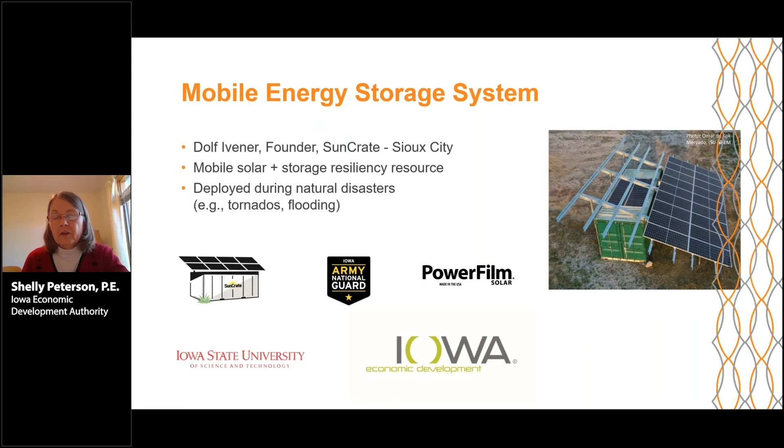Another example of that is a mobile energy storage system that we've recently worked with several partners on. And this project really deals with resilience and the importance of being able to provide energy in emergency situations and have a wide variety of dependable and available energy supplies.

So along those veins, we do believe renewable natural gas can offer many of these same opportunities in the state. We've got widespread biomass resources. This can be manure, corn stover, cover crops, landfills themselves actually can produce methane. And then there's a lot of food waste from the many food processors in the state, and from the consumer level as well. And all this has value in a renewable natural gas system.

These types of projects can offer a lot of benefits to the state as well. Not only can you generate revenue from that energy resource, but we're really beginning to explore the water quality benefits, odor control benefits, the ability to reduce the burdens on our landfills, and really begin to look at soil health as part of this overall system.

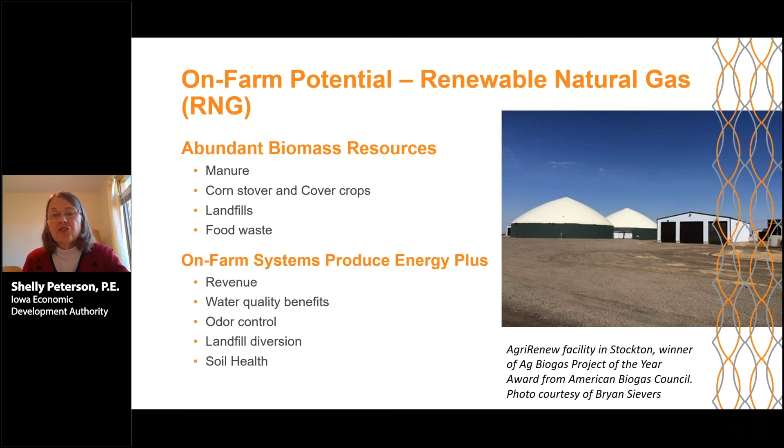The photo shown in this slide is from probably one of Iowa's first successful biogas systems in the state. This is operated by Bryan Sievers in Stockton. He's got 2,400 head of dairy cattle and has been running this system for going on 7 or 8 years. And a lot of lessons learned that he's shared, I think, really help prepare this next generation of digesters in the state.

Another example of a biogas project is Verbio, which has repurposed the DuPont cellulosic ethanol facility built in Nevada to begin accepting corn stover and producing renewable natural gas in the coming year. In addition, they're also going to produce corn ethanol here. So it will be the first facility in the US to produce both ethanol and RNG, and just another example of how this technology can fit with the many ag resources in the state of Iowa.

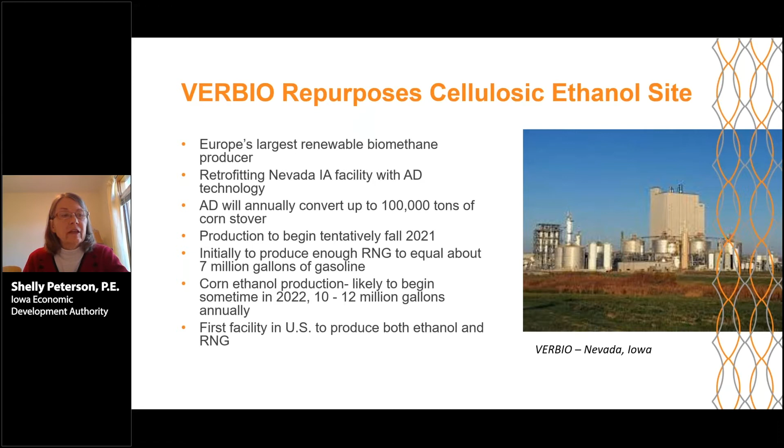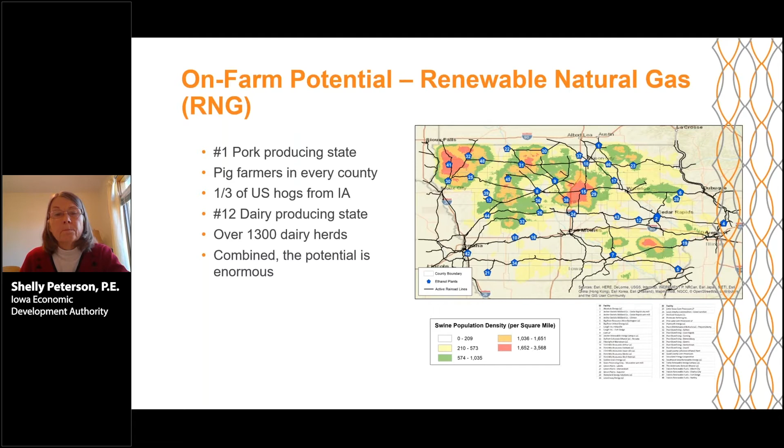As I mentioned, our office has been working in this space for a couple years. We've done a lot of mapping, like the graphic shown here, trying to identify where are the animal confinement operations, where are the natural gas pipelines, looking at the synergy between ethanol plants, which can use a lot of natural gas, and these animal confinement operations. And so we've looked at these various feedstocks, different end users, done some economic analyses, and again, just are moving ahead with thinking that these projects could really open up in the state and really serve as an economic driver.

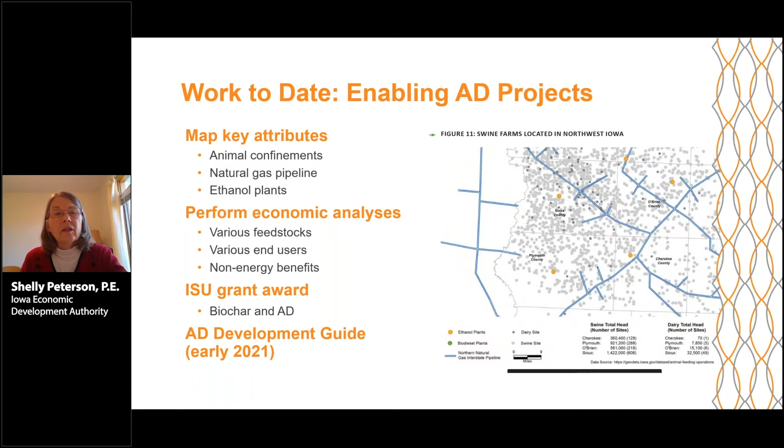We've issued some grants to Iowa State University. There's a lot of research going on in anaerobic digestion. And in early 2021, we've got an anaerobic digester project development guide that EcoEngineers is working on, which should be released, and hope to just maybe provide a roadmap for people that are looking to get into this type of project development.

And it's not just the producers that have goals along these lines. A lot of the food processors throughout the state and throughout the country are also really bringing forth pretty ambitious sustainability goals. And so there's, I think, a definite partnership between the producers and the food processors with these common goals. I think that really sets us on a good pathway to bringing biogas systems into the state.

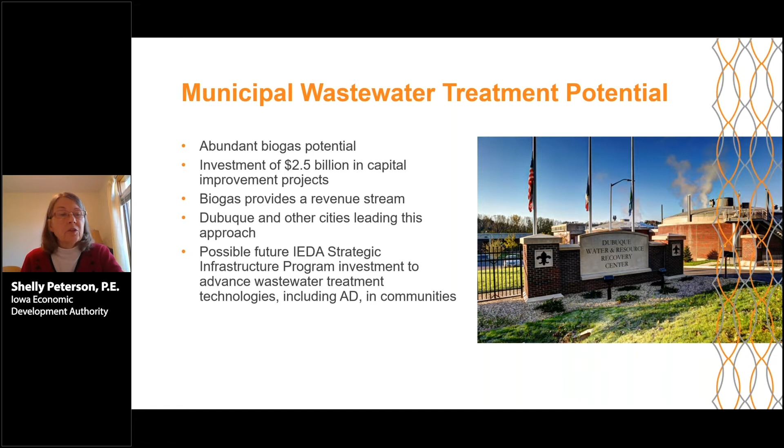So in response to the COVID pandemic, the governor assembled an advisory board recently, and there were a number of committees and subcommittees that met. And one of these was the Agricultural Working Group. And this group came out with a number of recommendations, two of which kind of floated to the top. That was a need for long-term water quality funding. But more importantly to this discussion is the formation of a carbon sequestration task force to really look at the role between farmers and long-term sustainability efforts.

And so this group is going to kick off in 2021, and I think will really help us evaluate anaerobic digestion and other actions that can really support these larger carbon goals that the state will be considering, and how we can play a space in the national effort and programs to better account for carbon management, especially as it relates to soil health in our state.

And so again, I'm with the Iowa Economic Development Authority. Our sister agency is the Iowa Finance Authority. And just yesterday, I learned more about a project for three large anaerobic digesters that's been proposed in the northwest corner of the state. And a request came into the Iowa Finance Authority to help them with a bonding project. The Iowa Finance Authority has the ability to bond for private activity bonds, and was looking to partner with the group to do that. So we'll be watching that too in the coming months to see what role our organizations can play as partners look to find ways to finance these types of projects.

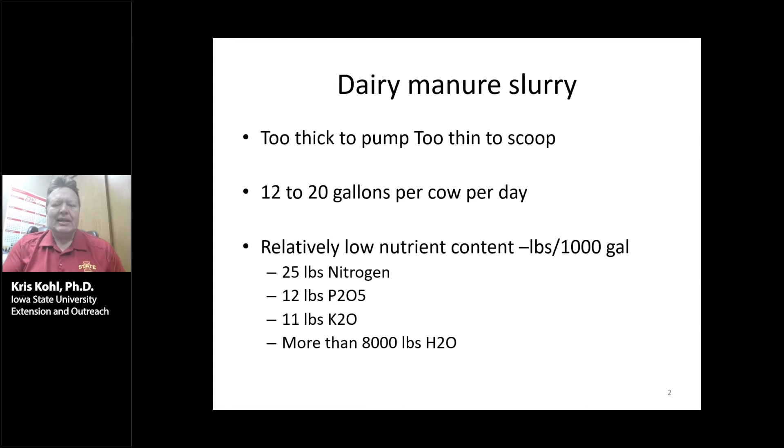It's made up normally of about 10% or so solids. At 20%, you can scoop it up and put it into a spreader, and it will spread just fine. It's mostly water, and water is heavy, and at this point we don't see it as all that valuable on our landscape.

Dairy manure tends to have a high cost for handling, storing, and land applying. Generally speaking, if we look at all of those things, the fertilizer value in the manure will not cover all of the cost. And then it often, I'll just say, contains what I'm going to call hidden hazards.

Sand bedding is a fairly standard thing in our free stalls. The sand is going to be very corrosive and wear hard on steel moving parts. Oftentimes there'll be other stuff that can end up inside the manure that's, I'll say, junk, like twine.

I was at a dairy, and they were having a lot of problems getting rid of their manure, and they couldn't get people to even pay for the nutrient content when it was land applied for free. I went out to the storage pond, and I looked across the whole thing, and it was covered with jellyfish. And I'm like, what is all this jellyfish? I've never seen jellyfish on a manure storage structure.

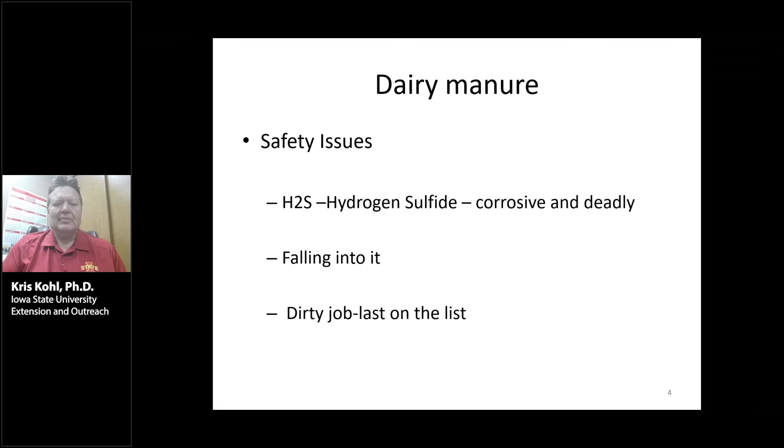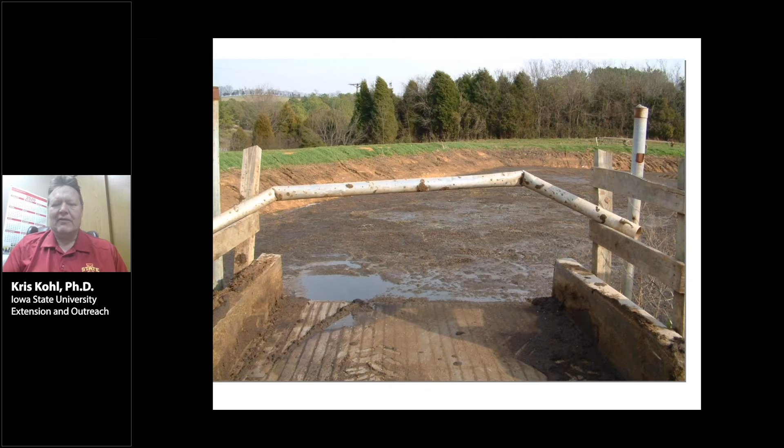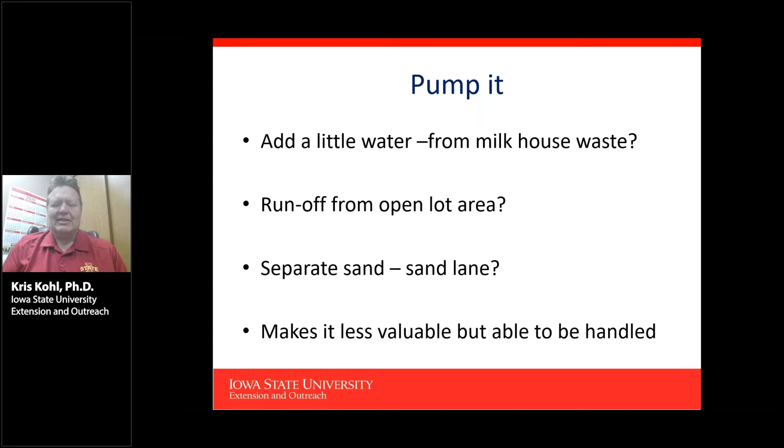We're going to pump it. We probably need to add just a little bit of water, maybe from the milk house. Wash water will make it so that it pumps a little better. Little runoff from an open lot area. And if we're going to pump it, we probably need to separate out the sand so it doesn't destroy the pump. And adding a little bit of water does make it a little less valuable, though not that terribly much.

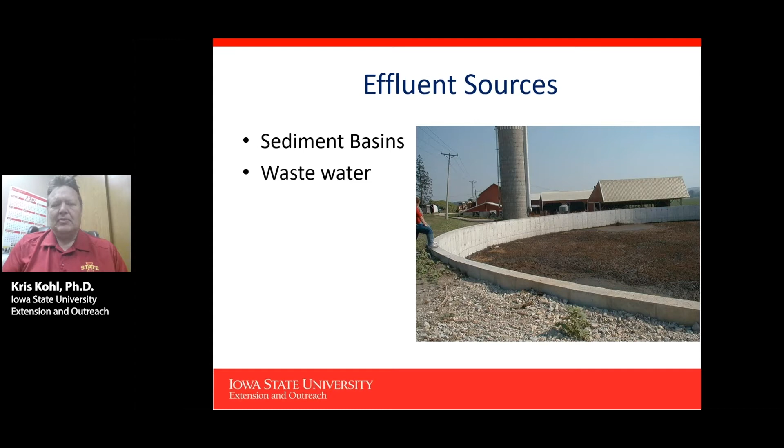Pumping the effluent, then we're going to use liquid handling systems. Wastewater runoff. Look at a few of the different pumps that are there that can handle it.

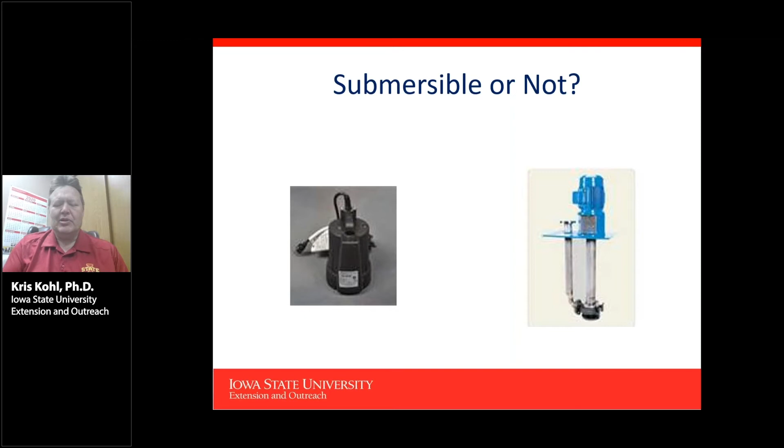Submersibles. Head and pressure when we're going to pump it. Dairy manure is very viscous, so it has higher head losses than other types, but we need to make sure that the pump is adequate for getting that. We'll take a look here at an example of a tank that's maybe 15 feet above the pump. So we've got 15 feet or so of that head.

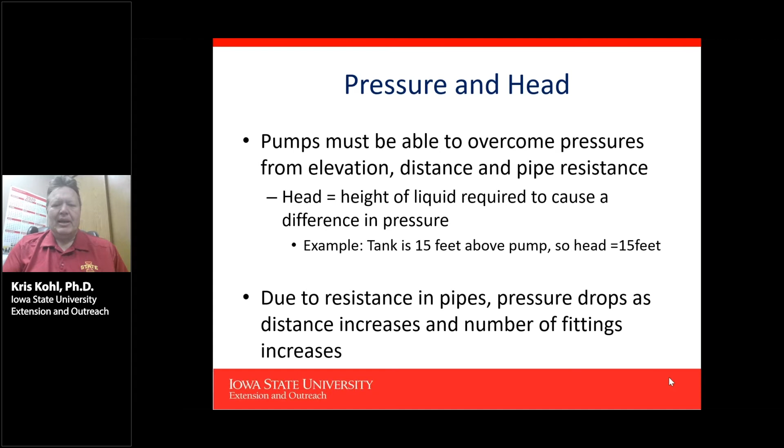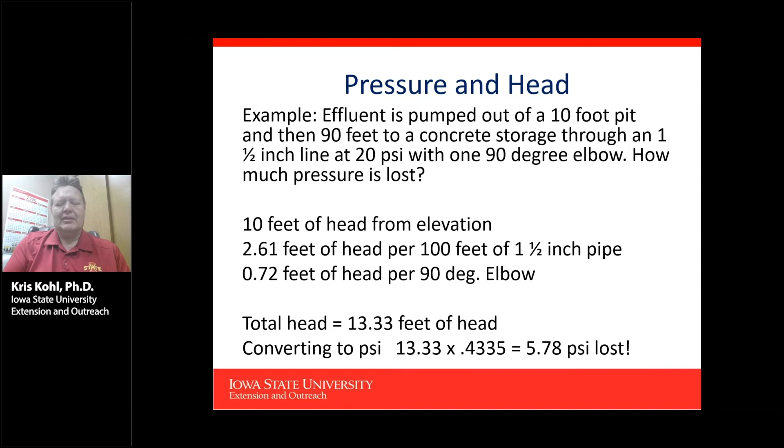We have the resistance in the pipe and the fittings, and fittings oftentimes add an awful lot to the amount that we have lost. Pressure head can also be measured in PSI, but we'll start with this one. So we have a 10-foot pit. We have then 90 feet to a concrete storage through a 1 1/2-inch line at 20 PSI, an angle, elevation, and an elbow, and you're going to end up with a loss of about 13.3 feet of head, and that's equivalent to about 6 PSI loss.

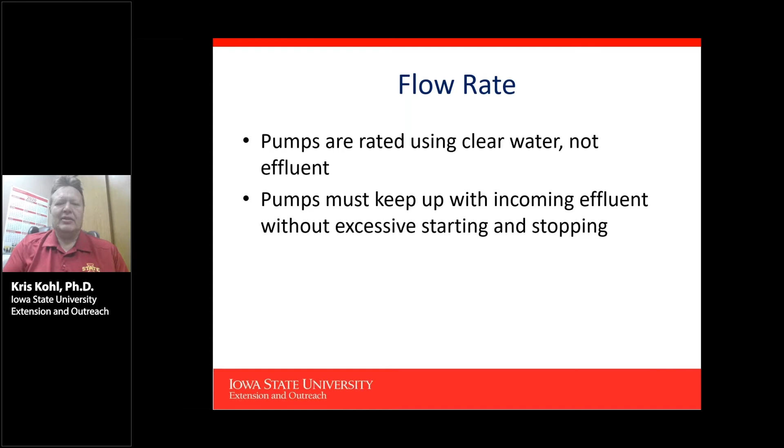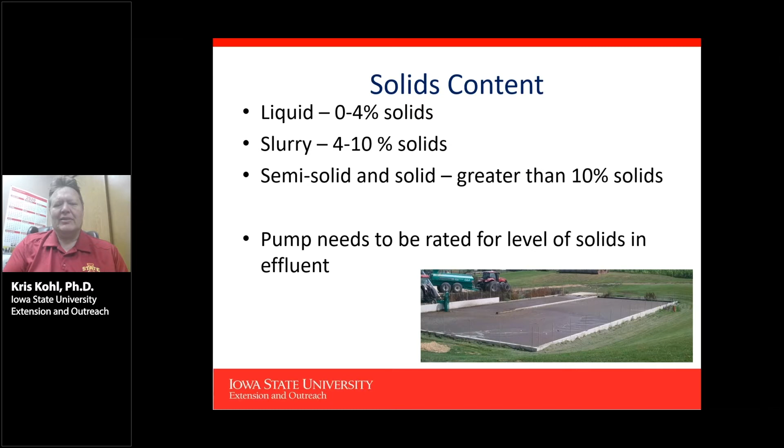Flow rates: pumps are often rated using clear water, not effluent, and they're going to perform at a lower standard than they would. Solids content: slurry, 4 to 10% solids, and coming out of the different facilities, we're going to have issues. Probably in most of these, we want to end up with a clean manure and get rid of any of the sand or other heavy things that go through there.

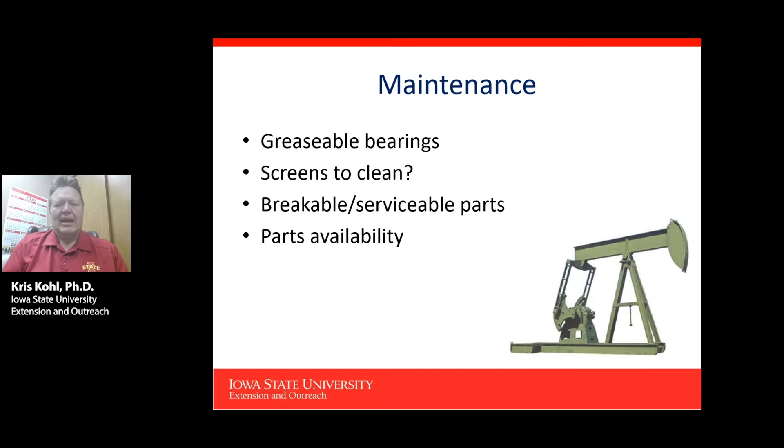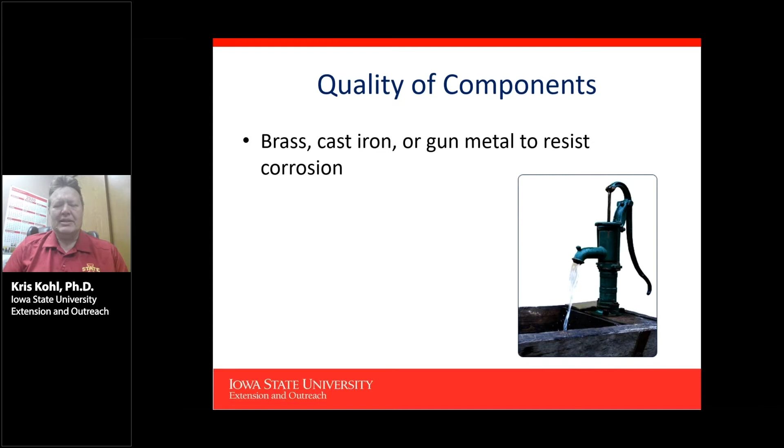Maintenance on pumps. Do they have greasable bearings? Most of them are sealed bearings. Are there screens to keep the big chunks out that can't be pumped? Are there breakable serviceable parts? And how easy are they to service? They're always in bad locations. Brass and cast iron are resistant to corrosion and often a good choice. Generally speaking, they're going to be setting in the liquid, so they don't have to be primed by hand, which is another problem.

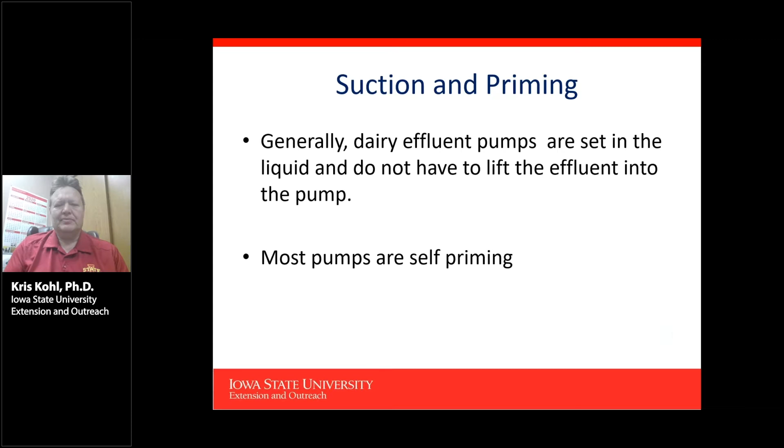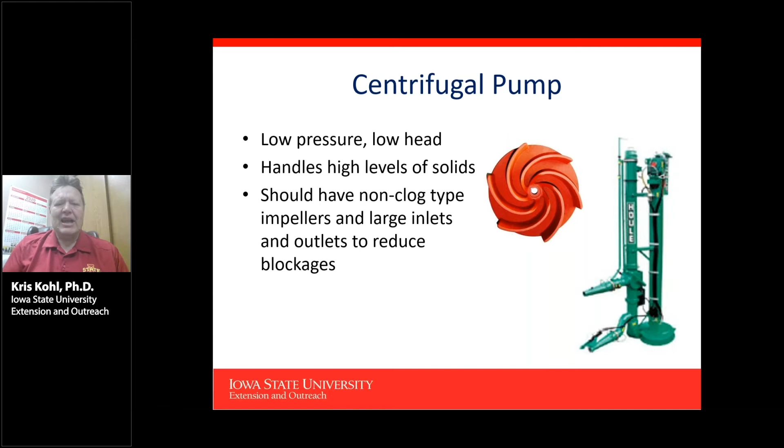Centrifugal pumps are pretty good, low pressure, low head pumps. They can handle the levels of solids that we have. They should have impellers that have enough clearance so that there is room for a little bit of material in there, and it reduces the amount of wear as well as the plugs and blockages that you have. However, these things do not do well with things like net wrap and those plastic AI gloves. They seem to end up on the middle shaft and wind up long enough until they have broke things.

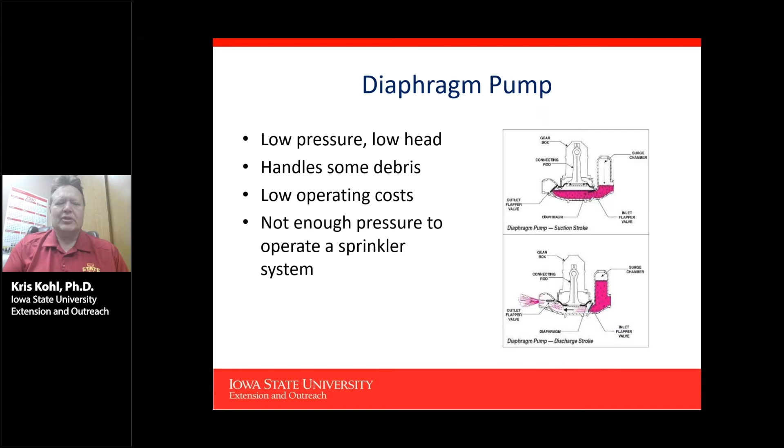Diaphragm pumps can handle a little bit more debris. They're also low head pumps. They have a low cost of operating, but they don't have enough pressure to ever go out to an irrigation system. The last set of pumps we have is piston pumps. They're high pressure, high head, but low flow rate. They can transfer high solids content, and they can handle probably the most foreign material in them.

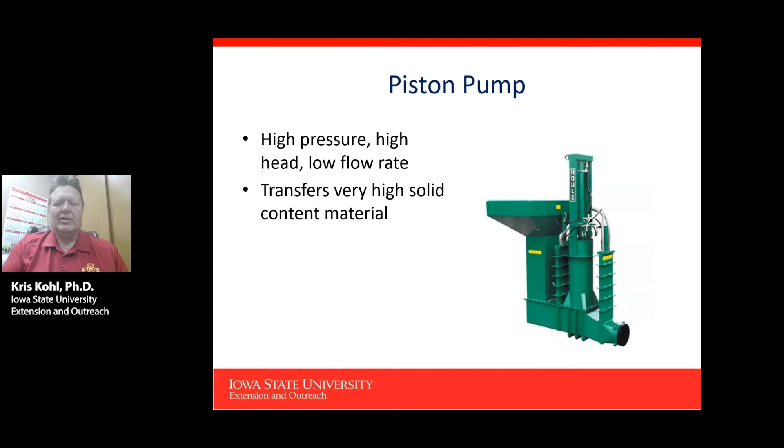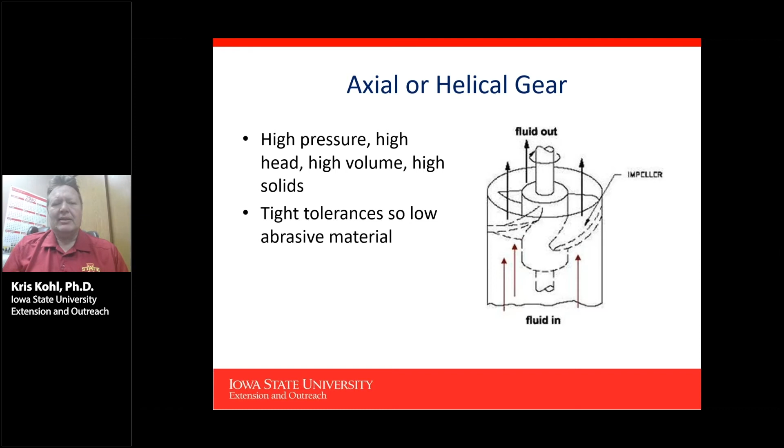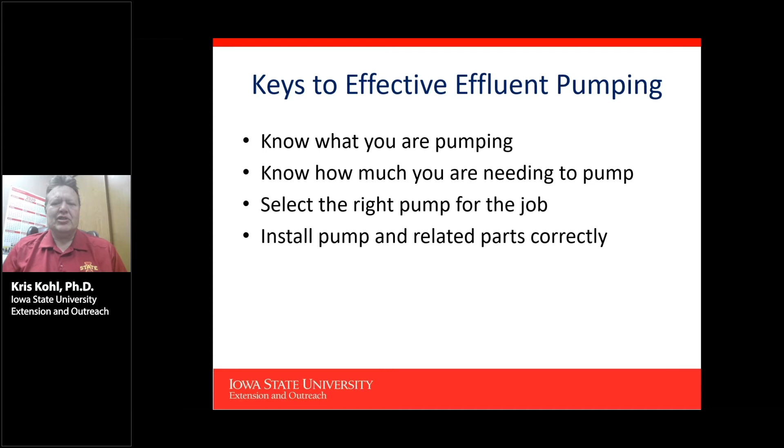Axial flow or helical gear. These also can move a lot. They're not going to be super high pressure unless you keep adding bowls. However, you can do that. They tend to have real problems with abrasive materials. So keys to pumping it: know what you are pumping, get the right pump for the job, and make sure that you can service it and get the parts that you need for it.

Another part that I just wanted to talk about a little bit: when you are pumping water for irrigation, and since over 80% of the manure is water, we normally are looking at a cost between 1.5 and 5 cents per 1,000 gallons pumped. Normal cost for pumping manure, if you're going to be hiring it done, is somewhere in that at least $0.015 per gallon rate, which is very high in comparison to applying water.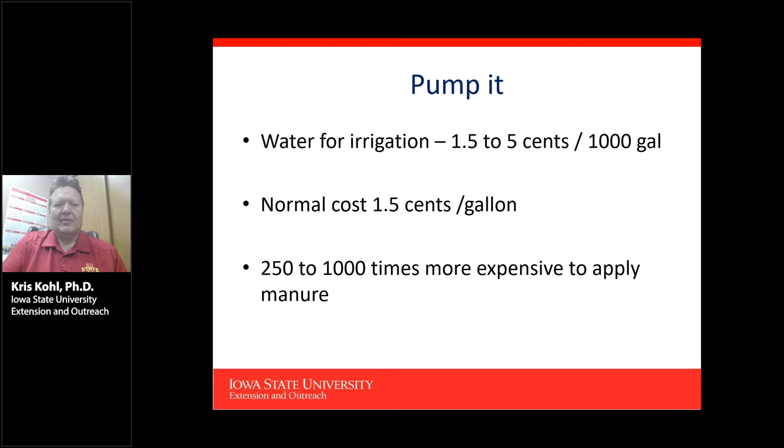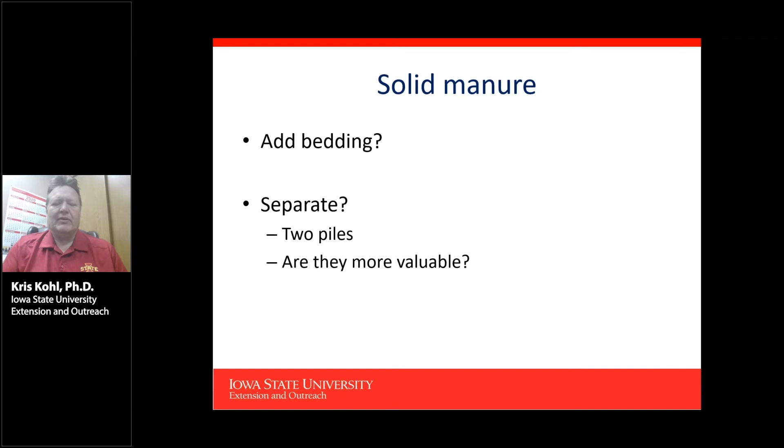To make it a solid manure, you can add bedding. If you do separate, and we have various separation equipment out there, like a fan separator and so forth, they will separate solids from liquids in dairy manure. You end up with two piles, and the question is, are they more valuable than the one you started with? Is one more valuable, one less valuable? They also require two separate sets of equipment for hauling.

And look at availability, especially if you're going to be selling it. What is the first year availability, following years? Dairy manure, beef manure, we're going to be assuming about 30 to 40% of the nitrogen is available first year. Potassium and phosphorus is all 100% available.

This is a sample of some solid manure that we're looking at, and this is out of the standard tables that DNR uses. Nitrogen at 18 pounds per ton, phosphorus at 12, and potassium at 11. At about today's value for nitrogen, phosphorus, and potassium, we have a value of about $21.50 a ton.

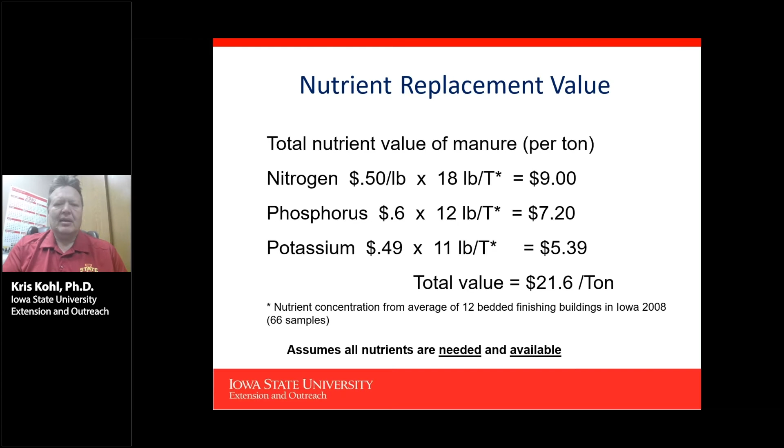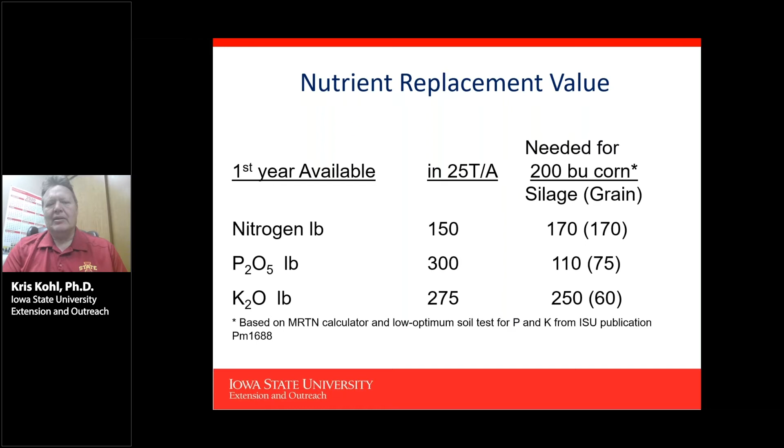Now, if we look at nutrient replacement value that we need for growing corn for silage, we'd be looking at about 170 pounds of nitrogen need. 25 tons per acre would give us 150. On the phosphorus and potassium side, we end up with much more than we actually need. Not all landowners are willing to pay for excess nutrients beyond the next year's need.

You need to work with them, and as we get higher and higher concentrations of livestock in northwest Iowa, and it continues to grow, the counties are more favorable to livestock in the northwest corner of the state, but we are going to end up with times when it's going to become harder and harder to get that applied.

I would encourage everybody that is looking at that to try to compare your cost against what the elevator would actually be, not only the material but also the land application cost, and maybe to take a look at, if you're knifing it in, a value of a tillage pass or so that's also in that. You're still going to end up oftentimes with application costs that are going to exceed the nutrient content, especially with the liquid.

Absolutely, you need to test the manure before each application, especially if your storage pit is outside. A drought year like we just went through, the nutrient content goes up greatly. When we have the very wet years, it tends to go down. And I would test it, I'll say 2 weeks before you're ready to apply it. You can probe that pit, get the nutrient content, and then you can make the appropriate application to apply what's needed.

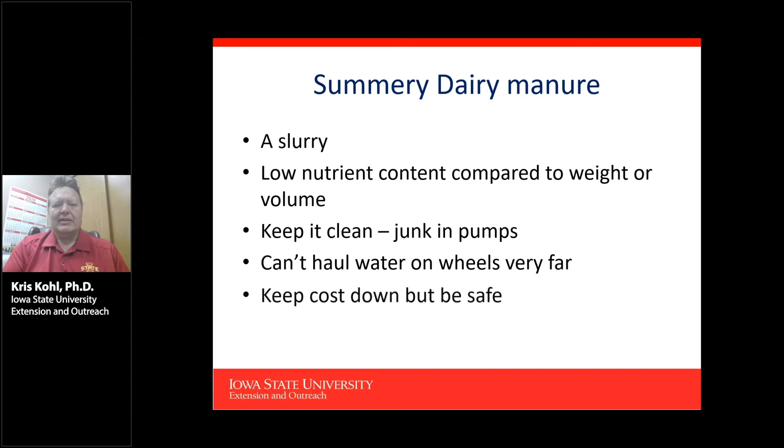So in summary, dairy manure is a slurry, so it's one of the more difficult to handle. It, generally speaking, has low nutrient content compared to its weight and volume. If it's going to have value, we have to keep it clean, keep the junk out, so that our equipment can work properly. And you can't haul water on wheels very far and keep it cost effective and be safe.

Carbon is the biggest disruptor of the 21st century, and the world as we know it is changing. EcoEngineers can guide you to make the best decisions as you navigate toward your clean energy goals. Our diverse team of carbon analysts, engineers, scientists, auditors, and regulatory specialists are trusted advisors of the clean energy fuel sectors worldwide. Clean energy regulations are a maze. We simplify them with an unbiased approach and fully manage your compliance. Modeling your carbon reduction is complicated. We quantify your emissions with a rigor based in science. Together, we can create markets that will protect and grow your investment. We create sustainable solutions for a better tomorrow. We are EcoEngineers.

All right, well, that was exciting. We haven't done that before, so we're just trying some new things out here.

And now we'll go talking about the dairy opportunity in front of Iowa dairy farmers, but also really any dairy farms across the United States. There's a lot of development, a lot of RNG work happening at dairy farms. I think here at EcoEngineers, we're tracking somewhere around 200 dairy to RNG projects. Currently, there's about 15 or 16 of those that are in operation, that are taking advantage of the incentive programs that we're going to talk about, and many, many more in development.

And so we'll talk about what that looks like, and then we'll round out the discussion with a case study, and how Iowa farmers can take advantage of this opportunity, and really what are the next steps and what needs to be done here.

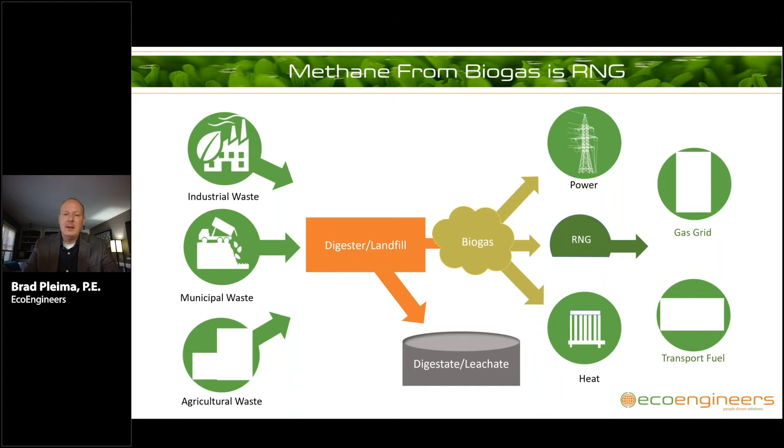So what's been the evolution? What's biogas been used for historically? What's not included here is just flaring that gas, not using it. If you go by a landfill or a digester and you see that giant candlestick flare, that's really just combusting the gas that's being generated and not beneficially reusing it at all. In fact, there's a cost to doing that.

But throughout the last couple of decades, people realized they could use that biogas for other beneficial uses. Primarily, that's been burning it as boiler fuel and replacing natural gas. We've also seen a lot of power generation, and CNG vehicle fueling and pipeline injection have been the next wave of this opportunity for biogas, and that's what we're going to spend most of our time on, because that is the highest value: cleaning up the gas, injecting it into a pipeline, and using that fuel as a vehicle fuel.

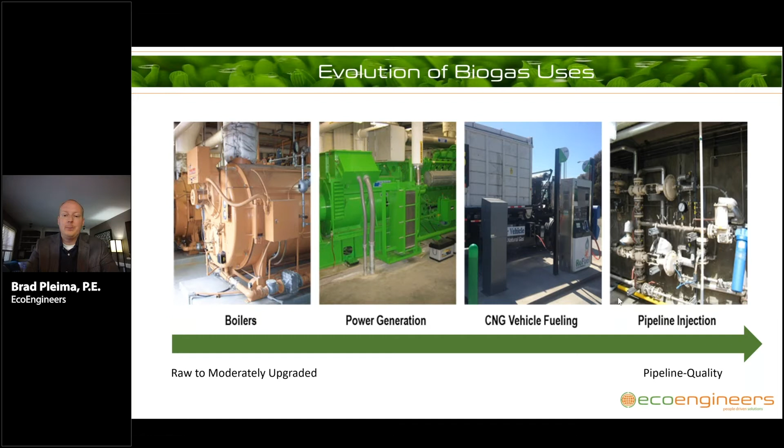One of the primary incentive programs available to any project across the United States, if you're using it as transportation fuel, is the Renewable Fuel Standard. Many of you are probably familiar with the RFS. It's really taken off with ethanol and biomass-based diesel. But when you convert biogas to RNG, that can generate RINs under the RFS program, just like these liquid fuels can. The program was passed in 2007 and really started to develop in 2009, 2010, focusing mostly on ethanol.

But in 2014, the EPA opened up the ability for renewable natural gas to qualify for an advanced cellulosic RIN, the D3 RIN. And those D3 RINs have the highest value of any of the RIN categories. It really spurred a lot of development, not just in dairy RNG projects, but at landfills, at the wastewater treatment plants that Shelly talked about. And we're still seeing a lot of development happening at those types of projects.

The goal of the program is to reduce the greenhouse gas emissions from transportation fuel. When this law was passed, Congress initially wanted to replace 36 billion gallons of our transportation fuel supply by 2022. That's 20% of all the fuel we consume in this country to be from renewable sources. We're not going to hit that level, but we are climbing, and we're a little over 20 billion gallons towards that goal. The current schedule is set out to 2022, but the RFS will continue beyond that. So the program does not go away in a couple of years. It will continue in some form.

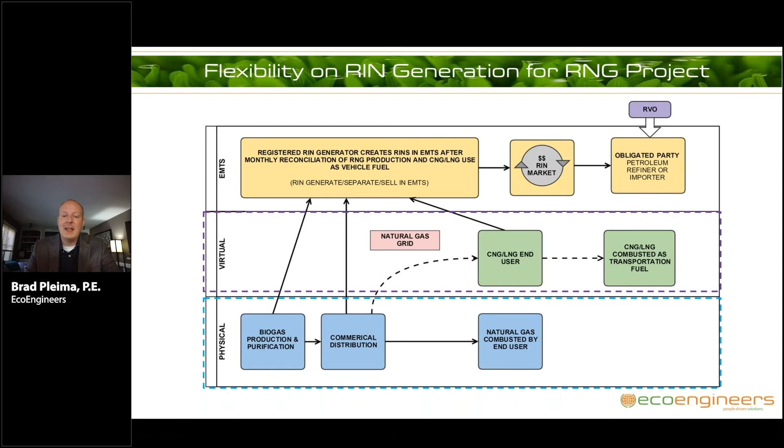We'll talk about another incentive program. A lot of this dairy RNG is going to the California markets because there's an extra incentive program to do that. And that program is called the California Low Carbon Fuel Standard, or LCFS for short. That program goal is very similar to the RFS, except it's targeted specifically to California transportation fuel emissions. So the goal of that program is a 20% greenhouse gas emissions reduction from transportation fuels within the state of California by 2030. It incentivizes the development of these low carbon fuels. It's a complement to the RFS program, but it's very different in how it's administered.

And so under the RFS, it's a volume-based system. So if you produce a gallon equivalent of fuel, you get a credit. In the California program, it's performance-based, and the lower the emissions and the greater the emissions reduction that you get from your specific project, the more revenue and the more credits you will generate from that same volume of fuel. So it's very different than the RFS, but in the same concept, where you have to demonstrate that the fuel that you produce is used as a vehicle fuel.

And you may say, we're here in Iowa talking about Iowa dairies. Why are we talking about the state of California and the LCFS program? And it's that concept of displacement that I mentioned before that really opens up the California market to Iowa producers. So we have a lot of ethanol plants here in Iowa. Many of those ethanol plants are taking advantage of the California LCFS program by railing, shipping their ethanol into the state of California to take advantage of this program.

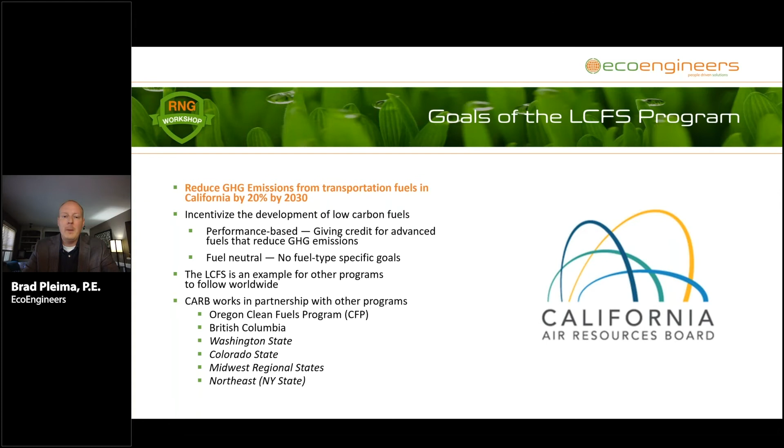So I touched on this. Happy to answer any questions about this. Won't get too deep, but in the state of California, every project is analyzed differently. So if we had two Iowa dairies next door to each other, they may generate a different volume, a different amount of revenue, a different amount of credits from the LCFS program, because every project is assessed individually.

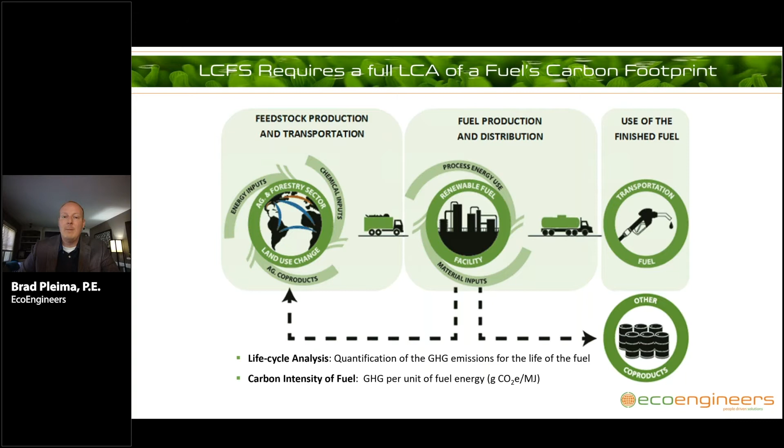So how is the feedstock collected? All of the things that Kris talked about, manure management, all of that has to be assessed and modeled in order to understand what that facility's carbon intensity score is. So you'll hear the term CI, which is carbon intensity of the fuel, which basically is a model and a measurement of the emissions reductions from your specific facility. And that is used then to monetize the value of this RNG into the LCFS program.

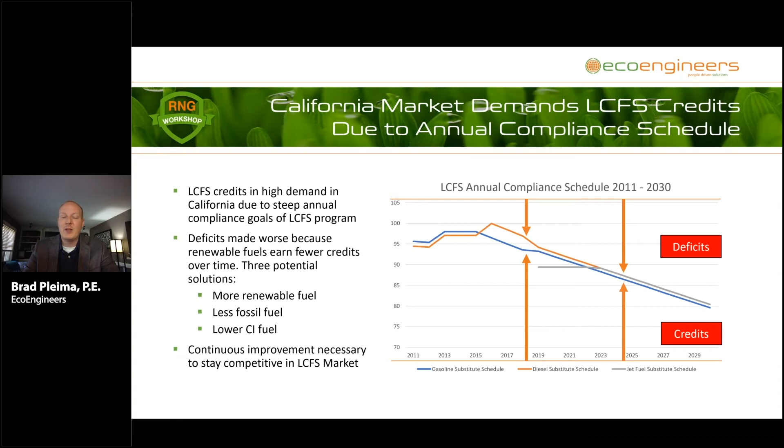So what we looked at here, this program is detailed out already to 2030. We know what that looks like. The RFS program is more of a year-over-year review. The California LCFS program has this detailed schedule to 2030. So there's more clarity and more definition around what the future goals of the program are under the California program. And that's important, as we'll show in some examples a little bit later.

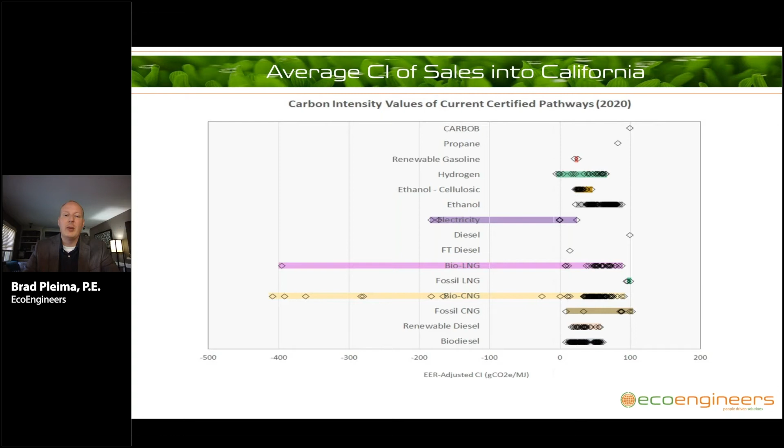So just to summarize this process, and to reiterate why an Iowa dairy farm could participate in the California program and the federal RFS, is that physical and contractual pathway I mentioned earlier. So if you look there at the left, we have the production facility, in this case an anaerobic digester at a farm. We have the project owner, somebody that is upgrading that biogas to pipeline quality renewable natural gas and injecting that into the natural gas grid.

We know the physical molecules will be commingled with all the other molecules that are in the natural gas pipeline. And then that gas is burned by a user. It's extracted and used along that system. And then again, the contractual pathway for those environmental attributes is done in California or other states, but mostly focused on California for these dairy digester projects.

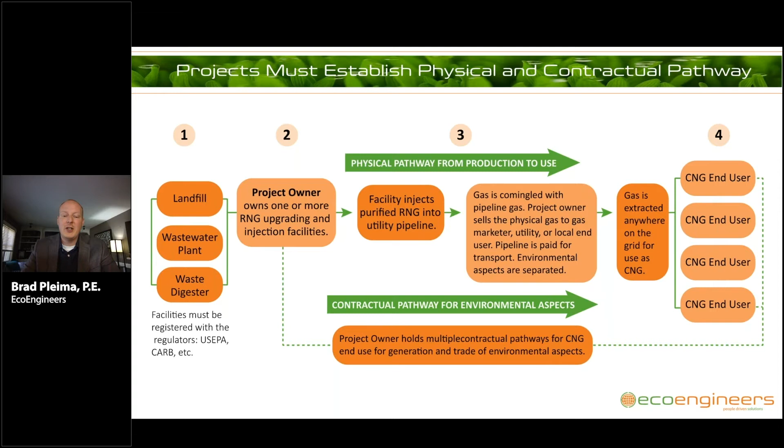So I touched on the carbon intensity, and why that's important is because the carbon intensity at a specific site, at a dairy farm, is a driver of how many credits and how much revenue is available for these projects. So that's something that needs to be modeled and analyzed at every specific farm. And farms that generate RNG more efficiently than a neighboring farm will be rewarded under the California program with more credits and a better, lower carbon intensity score.

And again, that measures all of the life cycle components. So how did you get the manure, the pumping that Kris talked about? How did you get that into the digester? How efficiently did you convert that manure into biogas? How efficiently did you convert the biogas into RNG and use that as a transportation fuel?

So what type of manure matters? Under the California program, this is specifically right now set up for dairy and hog manure, dairy manure and swine manure only. Beef cattle is excluded under the program, although there's some efforts to get that included into the program. Turkey or chicken litter also does not qualify for this ultra low score, which makes these projects very, very attractive. Those still may be good projects, but the value into California is significantly more for dairy and swine projects.